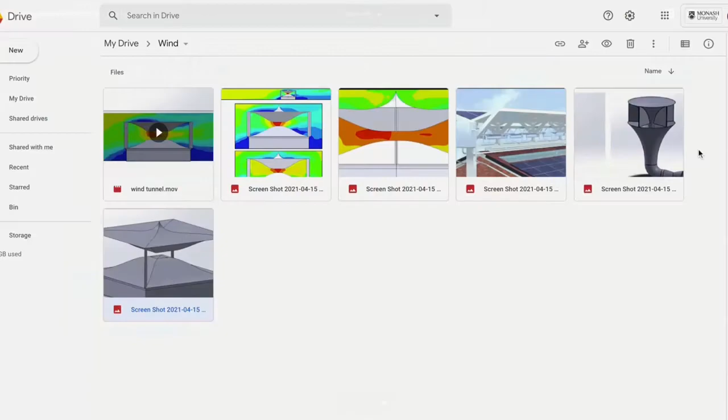So it was one way I just thought of, especially for people in climates like very northern Europe, where during winter you have darkness for pretty much the entire day. If someone was there and really wanted their own renewable energy source to be more sustainable, they really would have no options, because solar is the only one that's practical at the moment.

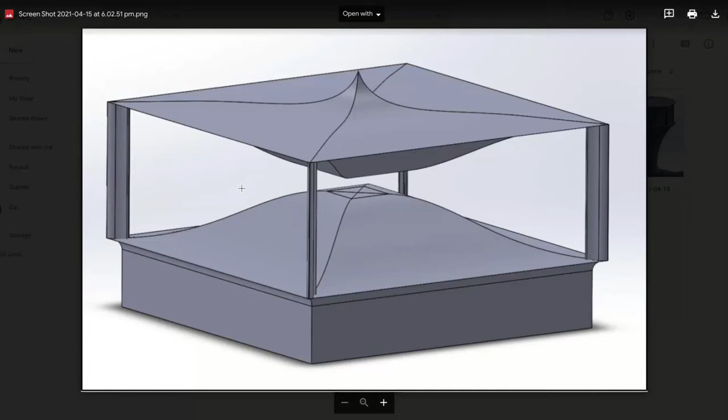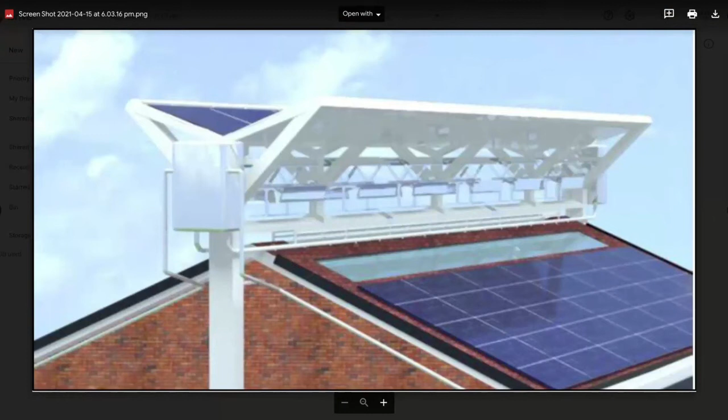So I thought we could try and speed up the wind, because the energy a turbine can generate is so heavily reliant on the wind speed. I was just trying to look at how I could increase that speed as it passes over your roof. So as I went back to the idea last year, trying to think how I could improve on what I did in high school, I really first wanted to see that it's something that someone hasn't just outright proven won't work yet.

And I found this really interesting paper by a Chinese team in, I think it was 2017. They found that they could increase the wind speed by having a V shape above their roof. In this system, they made that V out of a bunch of solar panels, proving how you could get a sort of hybrid system by using solar panels to increase the wind speed. And these little turbines proved to be a lot more effective in this system because the wind speed was increased even just by a small fraction. It was able to produce quite a lot more energy as an entire system, which I thought was really interesting.

And I also found this system by a company called Invelox. Their whole thing was to, again, just accelerate the wind. So this was for climates where the wind speed isn't quite good. The wind would come through this big 360-degree funnel sort of thing, and they'd pass the wind down and then through a choke point. And as the wind has to go through this small choke point, it accelerated quite quickly.

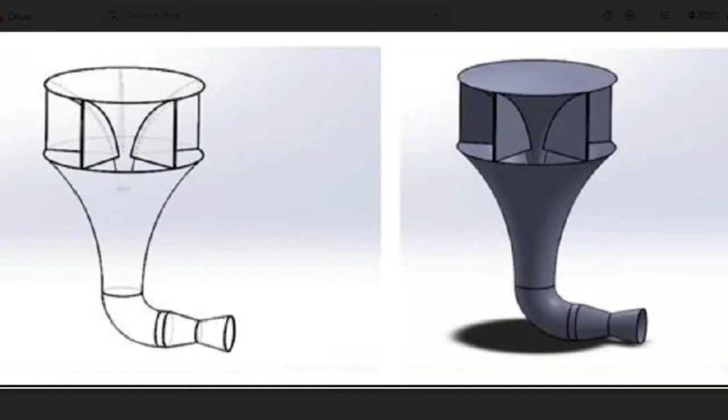And they were able to get turbines to produce up to, I think, 4 times as much energy as they would if they were just out in the open. So this was really interesting to me, to see that there are people looking into similar methods of accelerating the wind to try and create more energy.

That sounds really interesting. So it's about effectively being more effective with the amount of air that's passing through and concentrating it in a particular area. So you mentioned that the Chinese team had done some work on that. How does your design differ from theirs, in the sense that you said you wanted to make sure someone hadn't come up with the same kind of idea before? How does yours improve upon what the Chinese design had?

Yeah, so with the Chinese team, they had just the simple V shape above the roof, and then the roof would be acting as like an upside down V, which then pushed the air in. This only works though if the wind was coming perpendicular to the V, so it would be pushed down. If the wind was coming from the side, it would actually get blocked by the pillars that hold up the solar panels. So my design hopefully improves on this by being less dependent on wind direction, as I've sort of taken the roof design and spun it 360, so it's almost identical from any direction.

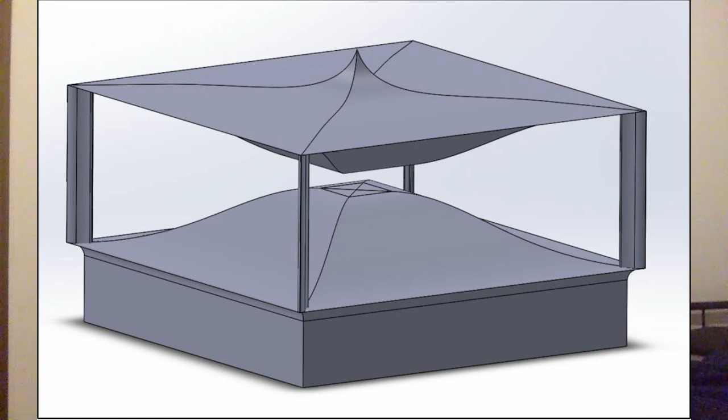The only real difference is the diagonal walls that are meant to push the wind in horizontally. Unfortunately, if the wind's coming at a 45-degree angle to the house, the diagonal walls can't push the wind in horizontally, so you end up getting the wind spread out a lot more. So the total velocity of the wind is a lot lower, but it still is higher than if the roof system wasn't there. I think it still increases the wind speed by about 20%, which means the wind turbines would still function almost twice as well as they would in the open. So it is still an improvement, but not as much as if it's coming directly face on with the house.

This works well in a situation where we've got houses in suburbs and things like that. How about in built up urban areas, especially with cities like Hong Kong or very densely populated areas like that, where there is effectively a wind tunnel effect in a lot of the apartment style housing? Is there a way that this can utilize that wind tunnel to bring up that increased wind speed? Yeah, my specific design didn't quite match that because I just didn't have enough time to account for all those variables.

But when looking into this, I actually found a concept that was entered in the James Dyson Awards last year, where instead of making the roof this shape, they sort of fit a funnel in front of a wind turbine. And they found that that would be more suitable for an urban environment because there would be less space required. I wasn't able to see their results from their tests, but it did look quite promising. And I have seen some other companies in Europe looking into bringing wind turbines into urban environments.

One of the pages I follow on social media was sharing a while ago a company that's actually looking into using the wind from buses passing to spin these tall vertical wind turbines. So they use highway traffic to create energy through the wind. That was a very cool way you could see wind energy being part of urban environments, by just utilizing some of the movement we've already got going and trying to convert that into energy.

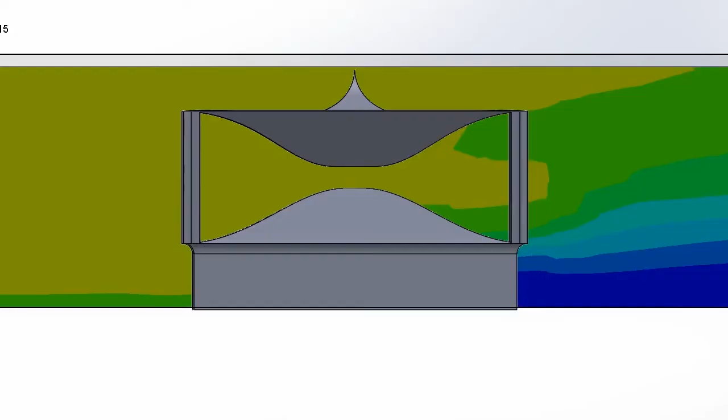And I think it will make a wind turbine produce about 3 to 4 times as much energy as it would outside the system. To be completely fair, that's not entirely accounting for the amount of turbulence that might be created. Unfortunately, the software I had to work with wasn't great enough to work out how much turbulence is involved to know how much that would affect the wind turbine. But assuming a low level of turbulence, this should be able to make a wind turbine produce 3 to 4 times as much energy as it would outside the system, which is still quite promising.

You mentioned the increase of wind speed to get into the center of the roof structure that you've got here. It would be, I'm assuming, a reasonably compact sized turbine. What amount of energy would you expect that size of turbine to be able to generate on the roof of a house? Yeah, so these would be small turbines that produce in the low kilowatts, so 1 to maybe 5 kilowatts of energy. But you would be able to fit multiple, especially if you're looking at vertical axis wind turbines. You could fit maybe 3 or 4 of them in the center.

For larger ones, unfortunately, at the moment, I couldn't quite find space for larger ones in a residential area because they really need a lot more bracing to function, because they're quite heavy. But you could fit a few of the smaller scale ones, which are about 1 to 5 kilowatts, and this hopefully will work a lot better because, along with the cut-in speed I mentioned earlier, those wind turbines have something that's called a rated speed, which is the speed that the air has to be going to produce the energy that's advertised.

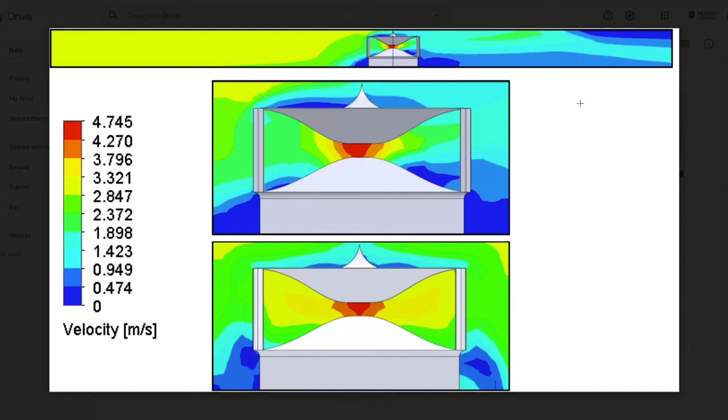Yeah, it was quite a boring first few weeks, and then the International Conference of Sustainable Development sent out the topics they wanted speakers for this year. And one of the topics was how we could make renewable energy more accessible. And then I was like, I can probably put something together for that. And then it was a few months of a lot of cramming to try and get this done on time. But I was very happy with the results by the time I was submitting the project.

Well, I think it's been a really interesting and really great idea, Jamali. So when you do get to this for your honours next year, we'd love to talk to you again to see where you've got to with this. Yeah, thank you. Hopefully, I can get a supervisor or someone to sign on. But hopefully, I can continue with this project. It was really fun to look into. And obviously, if any company out there is interested in supporting you on doing this, you'd welcome that too. Oh, absolutely.